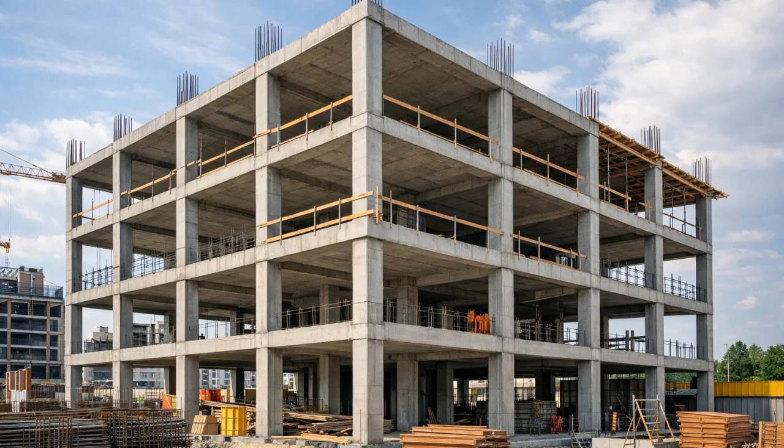Let us learn together. Today, we will see about classification of structure in building. In building construction, structures are commonly classified in a few clear ways, depending on how they carry loads, what they're made of, and how they're used. The first classification is based on load-resisting system. In this classification, we can see about load-bearing structures and framed structures.

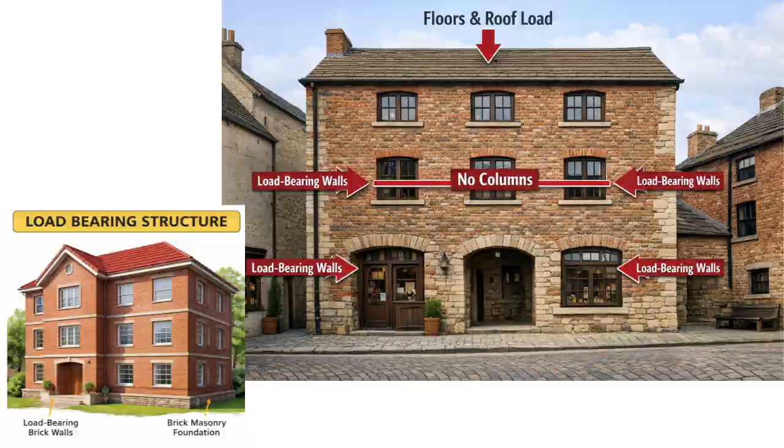Load-bearing structures are buildings in which the walls carry the load of the floors and the roof. In this type of construction, columns are not used, or only a very few columns are provided. The walls themselves act as the main structural elements. The load from the roof and upper floors is transferred directly to the walls, then to the foundation, and finally to the ground. Because of this, the walls are usually thick and strong, especially at the lower levels of the building.

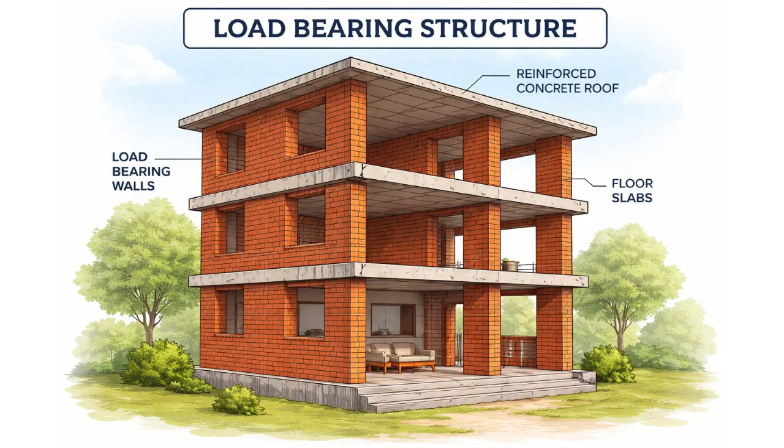Load-bearing structures are best suited for low-rise buildings, generally 1 to 3 stories high. For taller buildings, this system becomes uneconomical because wall thickness increases with height. These structures are commonly used in residential houses, particularly in rural areas, small towns, and traditional construction. Buildings made with brick masonry or stone masonry often follow the load-bearing system.

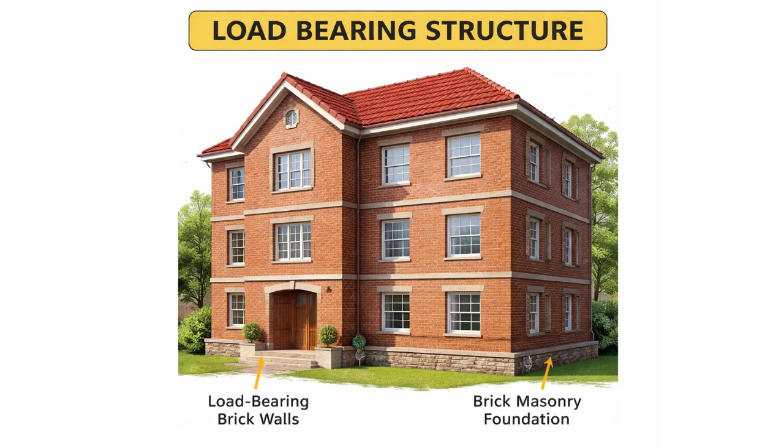Load-bearing construction is simple and economical for small buildings, but it offers less flexibility for future changes and expansion. Understanding load-bearing structures is important because they represent the traditional method of building construction and help us understand how modern framed structures evolved to meet the demands of taller and more complex buildings.

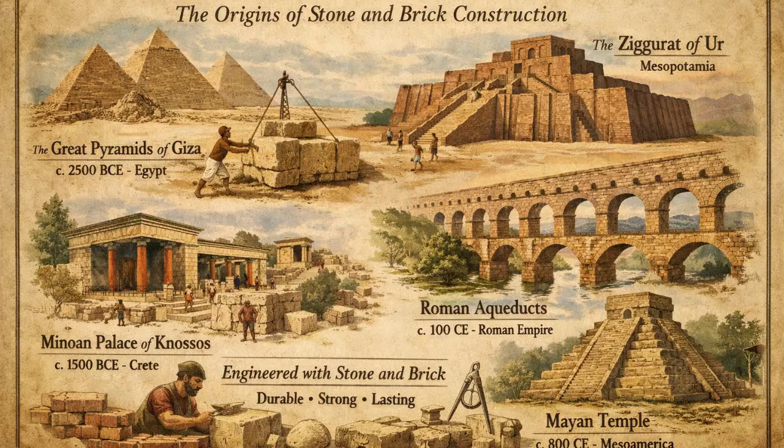Now let us understand framed structures, which are classified based on the load-resisting system of a building. A framed structure is a modern construction system in which the entire load of the building is carried by a framework of columns, beams, and slabs. In this system, columns are vertical members that transfer the loads safely to the foundation. Beams are horizontal members that carry the load from the slabs to the columns. Slabs form the floors and roofs and distribute the load to the beams.

Unlike load-bearing structures, walls in framed structures do not carry any load. They act only as partition walls used to divide rooms and enclose spaces. Since walls are non-load-bearing, they can be thin, lightweight, and easily modified. This provides great flexibility in planning and interior design, allowing future changes without affecting structural safety.

Framed structures are best suited for multi-story buildings, including high-rise buildings and skyscrapers. As building height increases, framed structures remain efficient and economical, unlike load-bearing structures. Most modern buildings such as apartments, offices, hospitals, malls, and towers are framed structures. The most common type is the RCC framed structure, while steel frames are used for very tall or industrial buildings.

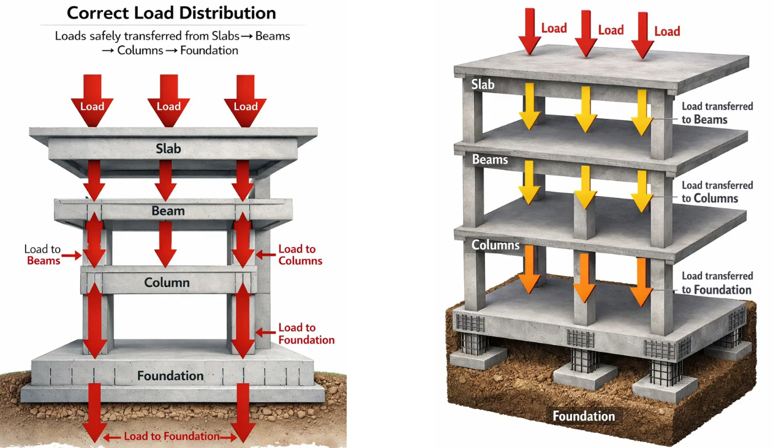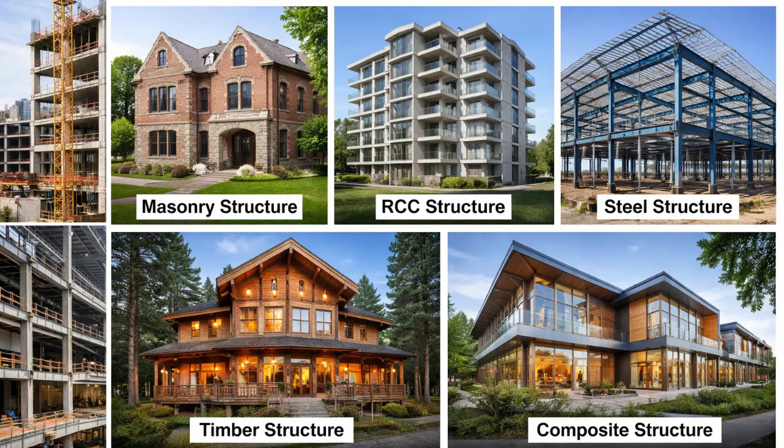The second is classification of structures based on material used. Now let us learn about the classification of structures based on the material used in building construction. The choice of material plays an important role in the strength, durability, cost, and purpose of a structure. Based on materials, structures are commonly classified into masonry structures, RCC structures, steel structures, timber structures, and composite structures.

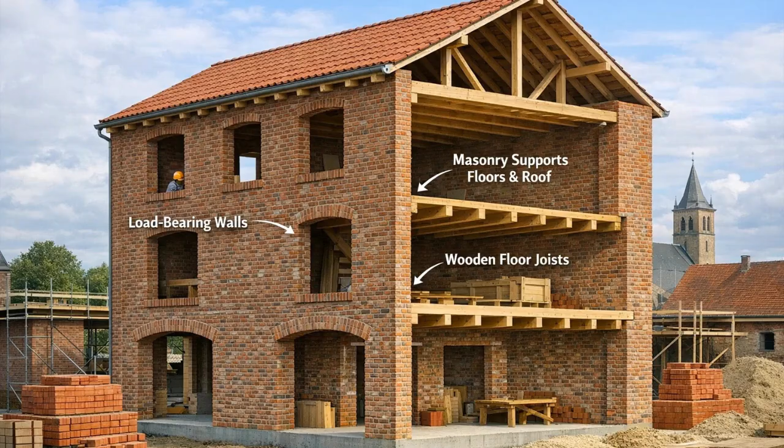First, masonry structures. Masonry structures are constructed using brick masonry, stone masonry, or concrete block masonry. In this type of structure, the masonry units are joined together using mortar. Masonry structures have good compressive strength, which means they can safely resist loads acting vertically. However, they are weak in tension, so they are not suitable for structures subjected to heavy bending or earthquake forces. Masonry structures are commonly used in residential houses, compound walls, and low-rise buildings, especially in traditional construction.

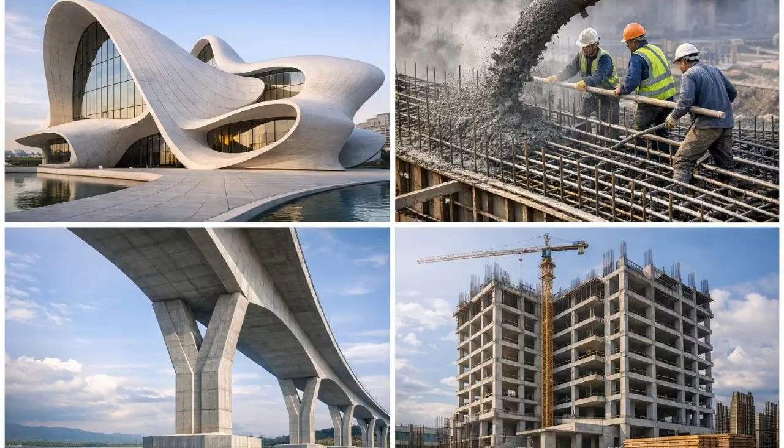Next, RCC structures, also known as reinforced cement concrete structures. RCC structures are made by combining concrete and steel reinforcement. Concrete is strong in compression, while steel is strong in tension. Together, they form a strong and durable construction material. RCC structures are the most common type of modern construction used today. They are widely used in houses, apartments, offices, bridges, and public buildings. Because of their strength, durability, and flexibility in design, RCC structures are suitable for both low-rise and high-rise buildings.

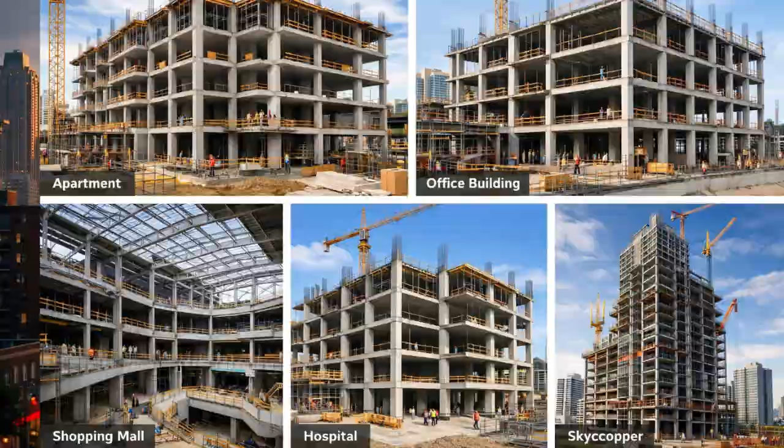Now, steel structures. Steel structures are made mainly of structural steel sections such as beams, columns, and plates. Steel has very high strength compared to its weight, making it lightweight and efficient. Steel structures are commonly used in industrial buildings, factories, warehouses, bridges, and high-rise frames. They are especially suitable for long-span structures and buildings that require quick construction.

However, steel structures require protection against corrosion and fire to ensure long-term safety. Next, timber structures. Timber structures are constructed using wood as the primary material. This is one of the oldest building materials used by humans.

Timber structures are mostly used in small buildings, cottages, and traditional houses, especially in areas where wood is easily available. They are lightweight and easy to construct, but they are less durable compared to RCC and steel structures. Timber also requires protection from termites, moisture, and fire.

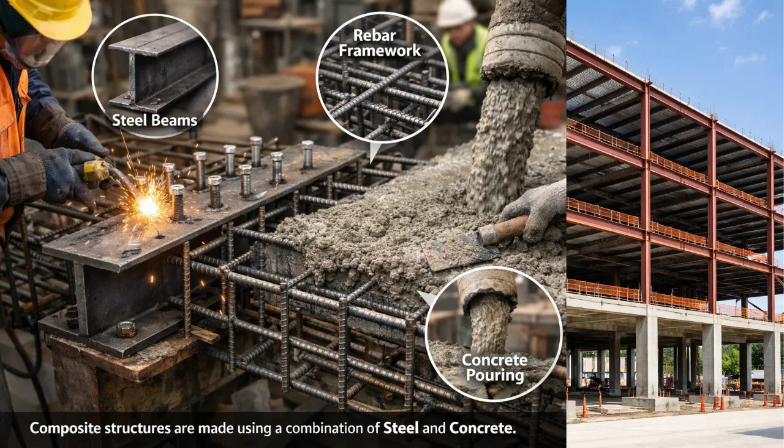Finally, composite structures. Composite structures are made using a combination of two or more materials, such as steel and concrete. In composite construction, each material is used where it performs best. For example, steel provides high tensile strength, while concrete provides compressive strength and fire resistance.

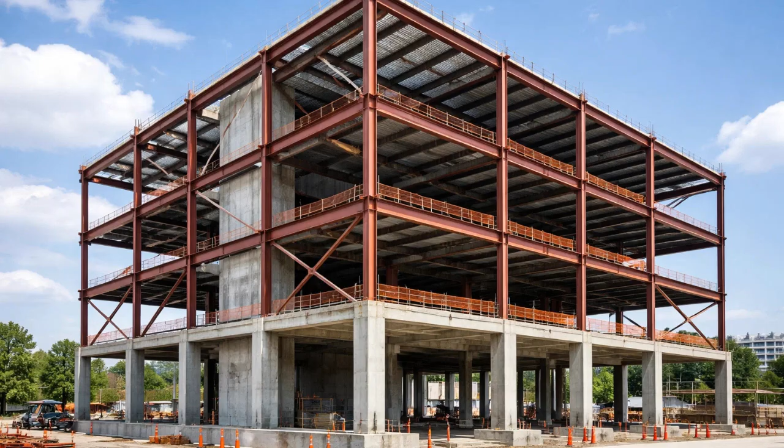Composite structures are commonly used in modern high-rise buildings, bridges, and large commercial structures. They offer high strength, efficiency, and economy. To summarize, classification based on material helps engineers choose the right structure for the right purpose.

Masonry, RCC, steel, timber, and composite structures each have their own advantages and applications. Understanding these materials is essential for safe, economical, and efficient building construction. Classification of structures based on material used has advantages and disadvantages.

Now let us learn about the classification of structures based on the material used in building construction. The choice of construction material plays a very important role in determining the strength, durability, cost, safety, and overall performance

of a structure. Depending on the type of material used, structures are commonly classified into masonry structures, RCC structures, steel structures, timber structures, and composite structures. Each type has its own advantages as well as limitations.

First, masonry structures. Masonry structures are constructed using bricks, stones, or concrete blocks bonded together with mortar. These structures have good compressive strength, meaning they can safely carry vertical loads. They are economical, easy to construct, and require less skilled labor.

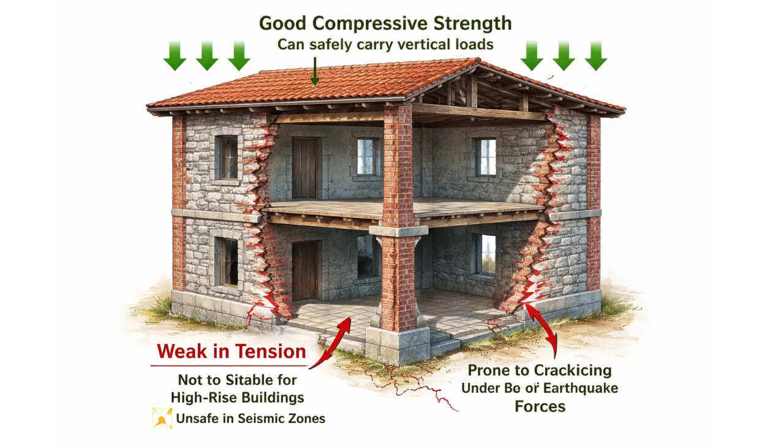Because of this, they are not suitable for high-rise buildings or seismic zones. Masonry construction is mostly limited to low-rise buildings, residential houses, and compound walls. Next are RCC structures, also known as reinforced cement concrete structures.

RCC structures are made by combining concrete and steel reinforcement. Concrete is strong in compression, while steel is strong in tension. This combination makes RCC structures very strong, durable, and versatile.

One major advantage of RCC is that it can be molded into any shape, allowing flexibility in architectural design. RCC structures also have good fire resistance and require less maintenance. However, RCC structures also have disadvantages.

They require proper curing and skilled supervision during construction. The initial construction cost is higher compared to masonry structures. If not designed or constructed properly, cracks may develop over time.

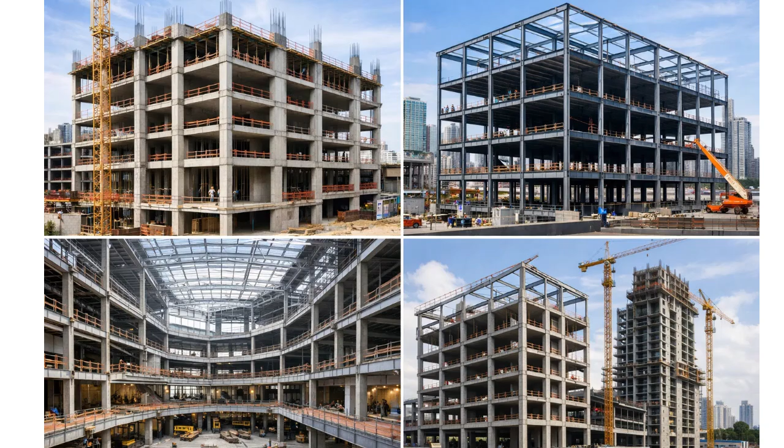Despite these limitations, RCC is the most widely used construction material today for houses, apartments, bridges, and high-rise buildings. Now, steel structures. Steel structures are made using structural steel sections such as beams, columns, and plates.

Steel has a very high strength-to-weight ratio, which makes the structure lightweight yet strong. Steel structures allow fast construction, large spans, and are ideal for industrial buildings, warehouses, bridges, and skyscrapers. They are also recyclable, making them environmentally friendly.

On the downside, steel structures are prone to corrosion and require regular maintenance. They also lose strength at high temperatures, so fire protection is necessary. The cost of steel can be high, and skilled labor is required for fabrication and erection.

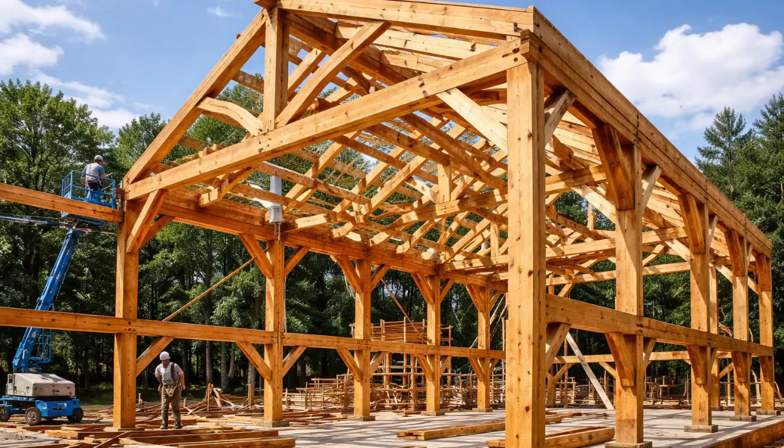Next, timber structures. Timber structures use wood as the main construction material. Timber is lightweight, easy to work with, and provides a natural aesthetic appearance. It is commonly used in small buildings, cottages, and traditional houses. Timber structures are also quick to construct and provide good insulation.

However, timber has several disadvantages. It is less durable compared to RCC and steel. Timber is vulnerable to termites, moisture, and fire, and therefore requires proper treatment and maintenance. Because of these limitations, timber structures are not suitable for large or long-span buildings.

Finally, composite structures. Composite structures are constructed using two or more materials, such as steel and concrete, to utilize the best properties of each. For example, steel provides tensile strength, while concrete provides compressive strength and fire resistance.

Composite structures are highly efficient, economical, and strong, making them suitable for modern high-rise buildings and bridges. The main disadvantage of composite structures is that they require advanced design techniques and skilled construction methods, which may increase initial costs. However, in the long run, they provide excellent performance and durability.